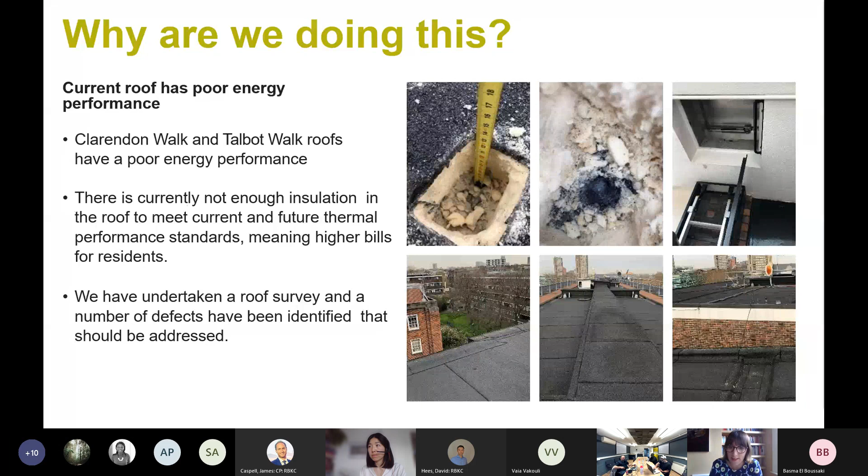Great, thank you, James. So on to the roofs in particular and why we're doing this. Clarendon and Talbot Walk currently have quite poor energy performance, and there is currently not enough insulation in the existing roofs, which means there's a lot of wasted heat and higher energy bills for residents as a result. We have undertaken a roof condition survey, and some of the images from the survey you can see on the screen here, and there have been some defects identified on the roof that need to be addressed. So what are the benefits of doing this for residents?

The first thing is really improving the thermal performance of the roof, which will help keep energy inside your home and in turn help reduce the bills. The roof improvement works are really the first step in the refurbishment of the block, and the work will contribute towards the aspiration of the estate to be net zero carbon by 2030. In summary, the benefits are lower energy bills, better thermal performance which helps keep heat inside the building, and a lower carbon footprint. It will also help us achieve a really good construction quality to deal with the defects in the existing roof.

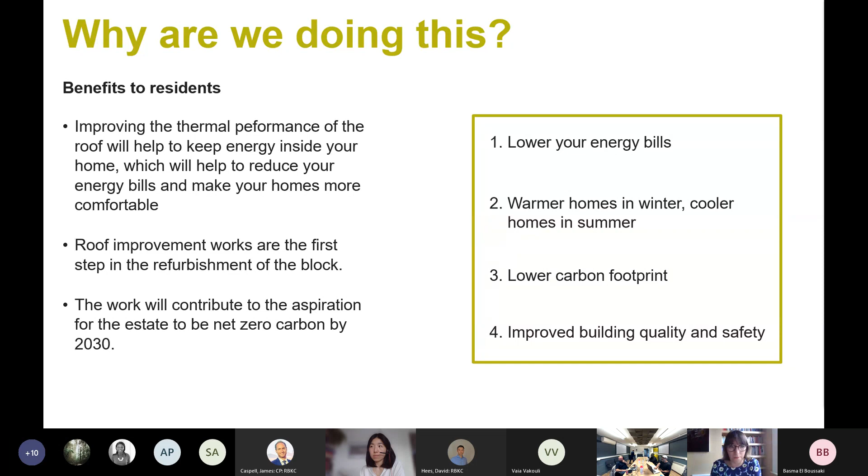This brings us to our objectives for the project. We'd like to prevent further heat loss through the roof by adding A1 non-combustible mineral wool insulation and a new waterproof roofing covering. We'd like to improve the visual appearance of the roof, both from the street and from neighbouring properties. And we would like to explore the potential to increase biodiversity and address air pollution through the works to the roof.

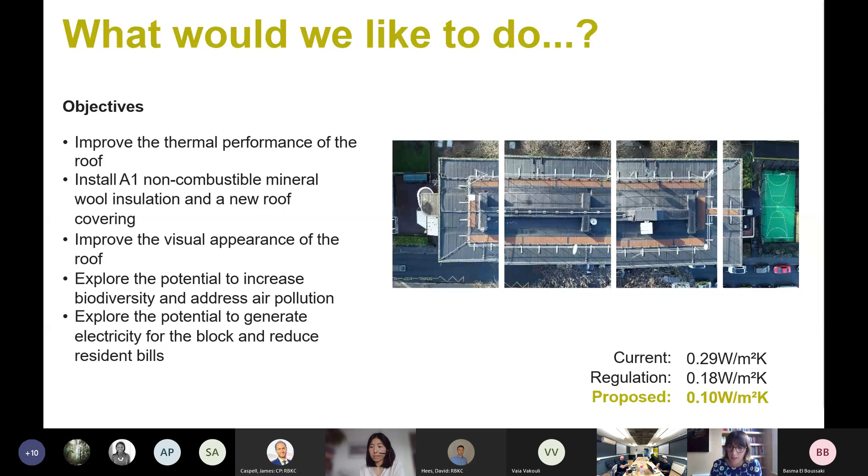We'd also like to explore the opportunity, as James mentioned, to generate electricity for the block and reduce resident bills further by looking at solar panels and how they might work for the individual blocks. There will always be some heat loss from the building, but our target for the roof is to reduce the overall heat loss down to about one third of its current heat loss.

Following the resident feedback and structural surveys, we'll then be able to move forward to complete the design development, hoping to start work on the project in autumn this year. The works will take around 4 months to complete, and our target at the moment would be to complete in spring 2022. There will be some further upgrades to the block needed as part of the estate-wide refurbishment, which will include, for example, installing new windows to the building, which would happen at a later date.

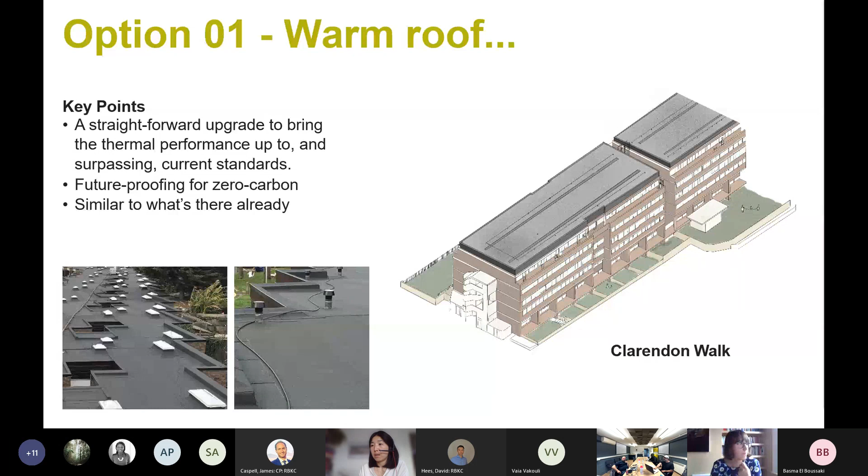This sketch shows a section of Clarendon Walk, and the next slide shows what it would look like on Talbot Walk. To give you an idea of the construction, on the left-hand side you can see the existing roof, which has roughly 10 centimeters of insulation. On the right-hand side is what we're proposing, which will have 37 centimeters of insulation and also an insulated parapet, so it's a much thicker build-up. All the proposed insulation will be A1 rated, which is non-combustible.

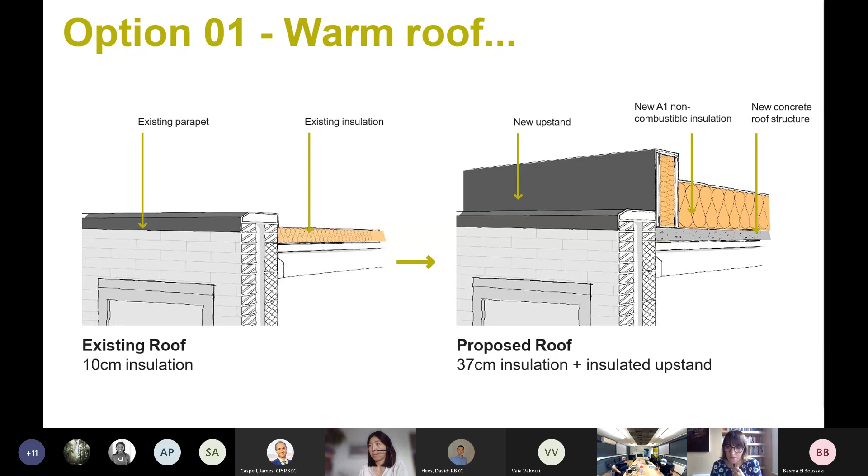So the second option we can consider is a green roof. The reasons for going green: it's visually more attractive, it can support biodiversity even if we just go for succulents such as those in the images on the screen, it can help reduce heat loss from the building as well as prevent heat gain, and it can also provide a degree of sound insulation.

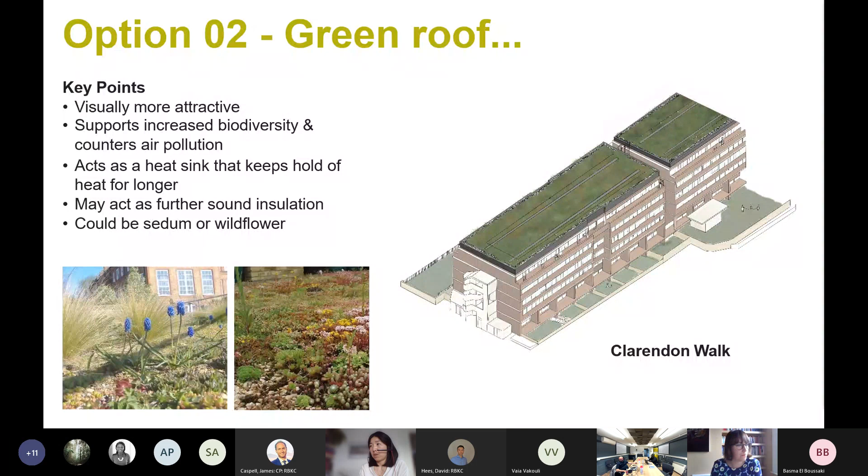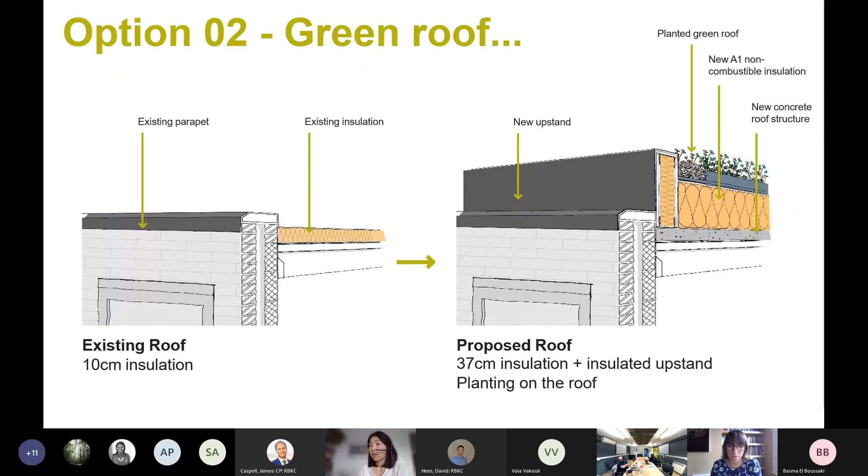So the sketch here shows how it might be applied for Clarendon Walk, and again for the next slide, Talbot Walk. Looking at the construction again, it's the same basic warm roof we showed previously with the 37 centimeters of insulation and upstand, and the green roof just sits on top of it. One point to note is that the green roof can be quite heavy, so until we complete the structural surveys just mentioned, we won't know for sure whether the existing buildings can take the extra load.

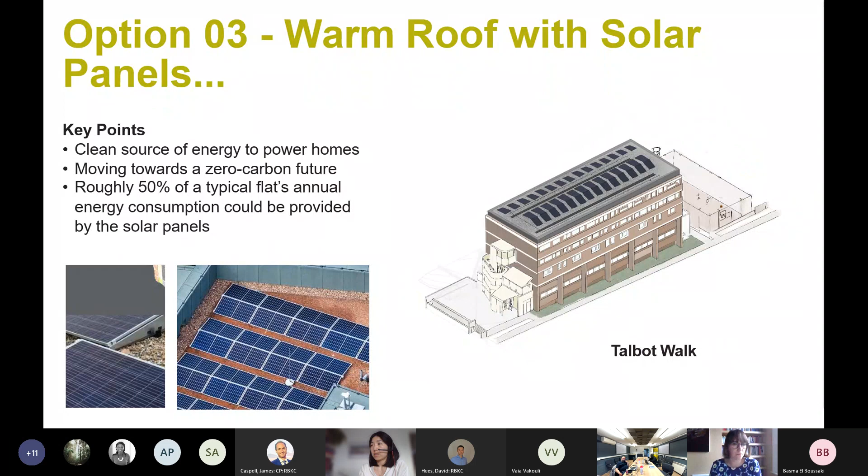So what we're showing here are the indicative layouts on Talbot Walk. Running through the construction, it's the same warm roof again, and the solar panels just sit on top.

So the final option is a hybrid solution, which puts areas of green roof next to areas of solar panels. The advantage of this option is that you can have the benefits of the solar panels to provide energy for the homes and support a reduction in energy bills, but you can also have the benefits of the green roof and help encourage biodiversity.

In this sketch we are showing the two different areas in strips, similar to the one in the photo, but you can also do different arrangements. For example, you can do half the roof or a third of the roof with either green or solar panels.

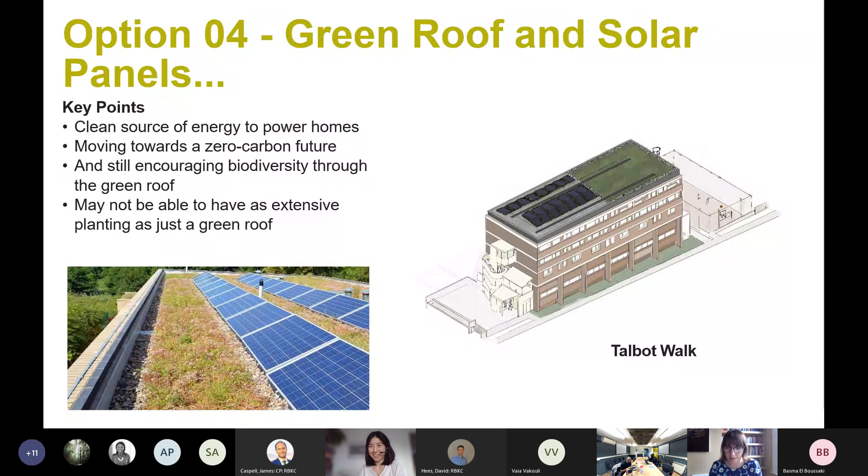Similarly, you can apply the same approach. Sorry, I froze for a second. We can move on to the construction of the build-up. You can see it's the same basic warm roof, with the PVs and the green roof sitting on top.

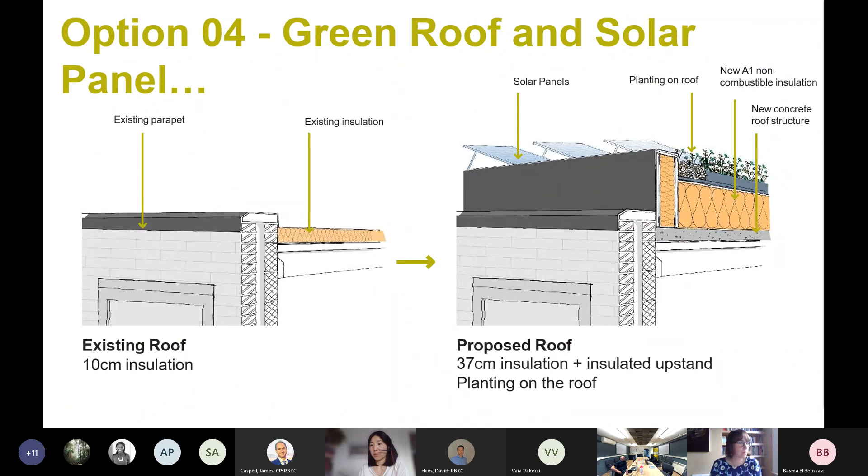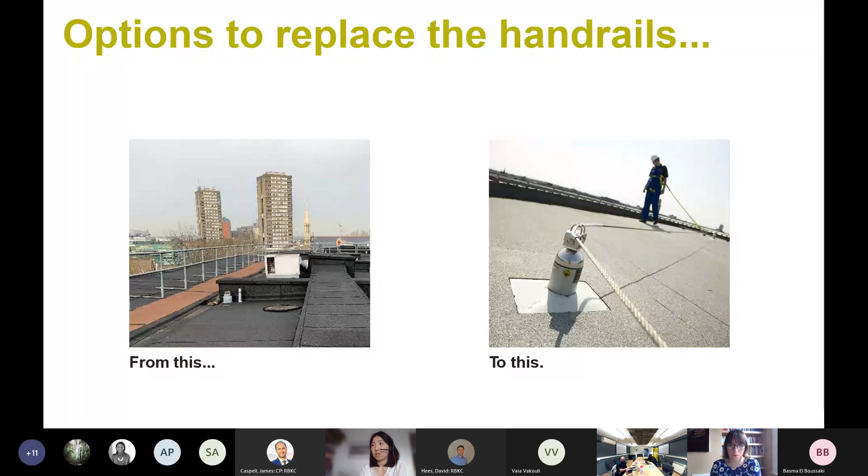To touch a little bit on fire safety, the roof proposals will be designed to meet all fire safety standards needed to satisfy safety regulations. Where possible, we're going to look to exceed these standards and use A1 and A2 rated materials as much as possible. In addition, we'll be working to the following standards, which have been recommended by a fire consultant.

This will look at strict management of the roof to ensure it's kept from drying out. We'll also make sure the growing media selected will contain at least 80% inorganic matter.

We can choose what kind of planting goes in, so it's a sedum roof made up of succulent plants. These would be more fire resistant as they tend to hold more water in the structure, and so they're less likely to dry out. We'll also be incorporating fire stops in the design of the layout, primarily around the perimeter, that stops the spread of fire.

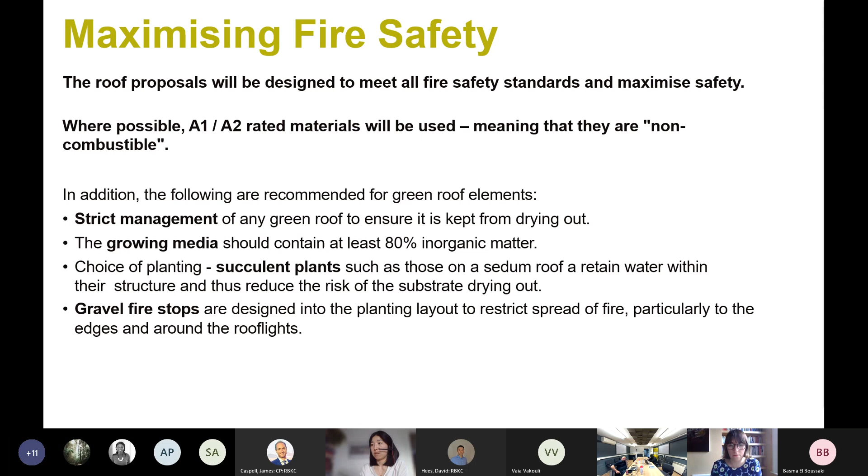Looking at maintenance of green roofs, it's recommended to be checked about 2 to 4 times a year. To maintain the warranty by the manufacturer, they require regular maintenance to be agreed through a contract. This will help ensure it performs correctly and prevent it from drying out.

For the maintenance of solar panels, it's recommended you check this once a year to maintain the warranty, and this should only be done by accredited bodies to comply. It's rare to have damage to PV systems, so most of the maintenance is really just to check that everything's working properly.

In terms of fire risk, solar panels, it's actually very low. The main risk is not with the panels themselves, but with the way the electrics have been installed. So making sure we use accredited installers will help to minimize this risk.

The other key risk area in terms of fire is the firefighting itself, and making sure the London Fire Brigade arrive with the right equipment. This is something the Lancaster West neighbourhood team are aware of, and they will work closely with the London Fire Brigade so that they're aware of what's required.

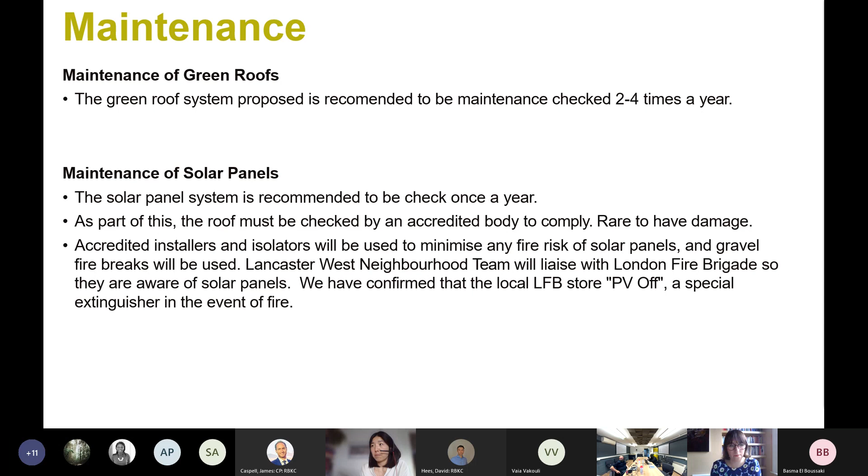Through our pop-up event we held a few weeks ago, and also the first webinar for your blocks, we received some initial feedback on the proposals for the roofs, and we've just included a section of these comments on the screen here.

To summarise, some residents we spoke to like the idea of solar panels, particularly focusing on reducing carbon emissions and protecting the environment. Some residents had concerns about allergies and pests on the green roof, and other residents were not sure if there was a benefit to green roofs if you can't see them.

Other residents were concerned about overheating in the homes, and we're very aware that there are existing problems with overheating in some of the homes in Clarendon Walk and Talbot Walk. So over the next few pages, we're going to answer some of the frequently asked questions that have come up through the engagement to date.

The first question on overheating is: will the proposals add to overheating issues residents are experiencing of their homes being too hot? We are currently undertaking an overheating risk assessment to understand the impacts of the new roof on indoor temperature, and this is happening ahead of the main refurbishment works.

We've already done the modelling actually on Camelford Court, and the results we've had is that putting on a new roof will not make any negative impact on overheating. It actually has a small benefit, but it is quite negligible. But they definitely won't make the existing situation any worse by putting on a new roof.

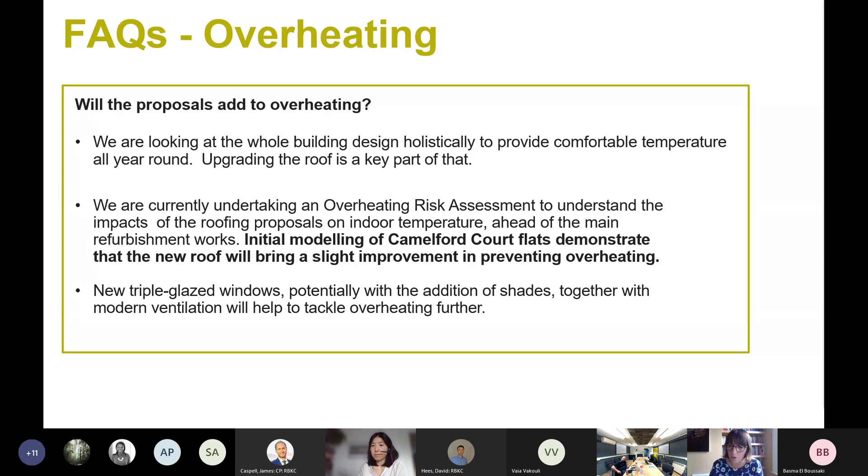When we look at the whole building refurbishment, our aim will be to provide a comfortable temperature all year round, and this can't be achieved just with the roof, but will need to be looked at through other building measures such as triple glazed windows, new ventilation system, and improving the existing district heating system. We will also look at options to introduce solar shading. So all these measures together will help to address the existing issues of overheating.

The second question is about solar panels. So the question is, in what way will I directly benefit from solar panels?

So the solar panels will generate electricity through radiation from the sun. Any electricity generated will be contributing towards the electricity needed for the homes and also for the communal areas, which means we'll need less electricity from the grid. So this should result in lower energy bills for residents.

For Camelford Court roofs, we've already done a bit of analysis on this, and we found that having 60% coverage of solar panels on the roof saved around £12,000 on the energy bills per year for the whole block. So we'd like to review this in more detail for Clarendon Walk and Talbot Walk. If residents agree, this is something to look at moving forward.

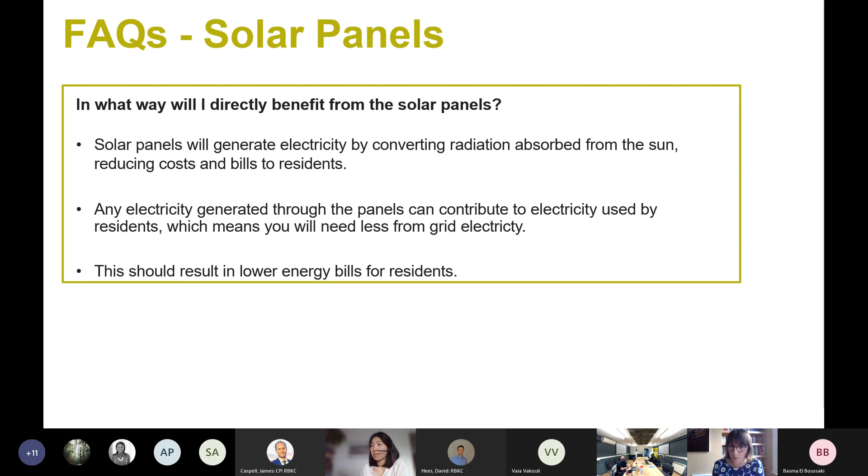So the third question is, what about the additional weight on the roof of the planting and the solar panels? Our structural engineer has been reviewing the additional loads of both the green roof and also the solar panels to make sure the existing building can take it. As mentioned, we do need to undertake structural surveys to make sure this is possible, and we will be looking for volunteers to help us as we need to access homes for these surveys.

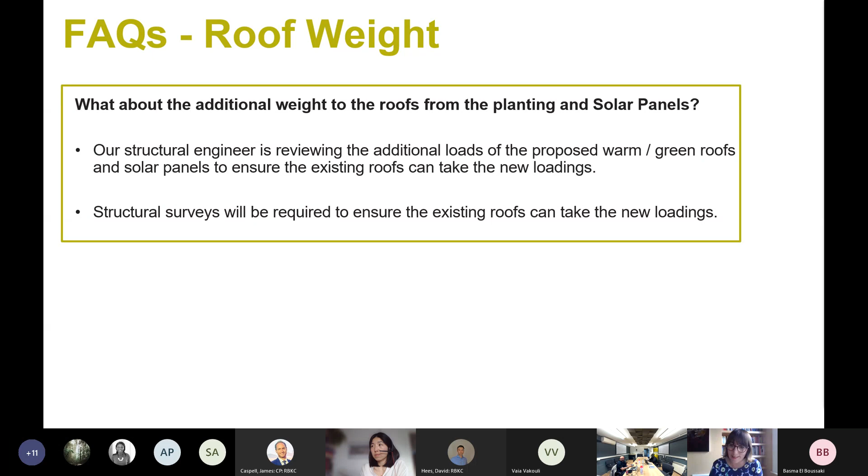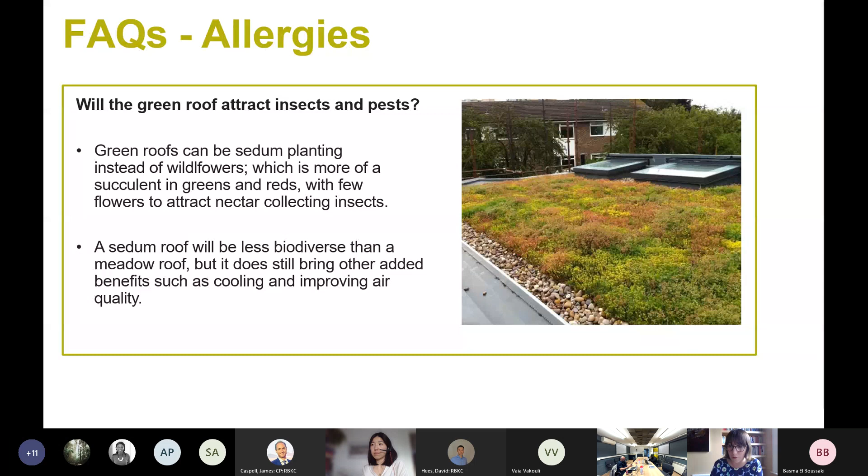So the final question that's come up a few times is regarding allergies, and will the green roof attract insects and pests? With the green roof, we can choose sedum planting instead of more wildflower or meadow planting, and this is formed of succulents. It can come in different colours - green, reds and yellows - and these have very few flowers, so they don't attract nectar collecting insects. Although a sedum roof is a bit less biodiverse than a meadow roof, it does still bring benefits of cooling the block and improving the air quality around it.

So just to quickly touch on the work we've been doing on Camelford Court roofs in co-design with the residents there, as it's quite relevant to your blocks as well. We've been looking at different options for green roofs and solar panels on those blocks, and looking at a combination of the two. We've also been looking at potentially having a gravel motif on one of the roofs of the blocks, also co-designed with residents. These roofs are overlooked by Camelford Walk.

So we would encourage residents of Camelford Walk to also be involved in this process. We'll be recording a webinar to update residents on the design specifically for Camelford Court on Tuesday, which will be uploaded to the W11 website. So everyone please look out for that one.

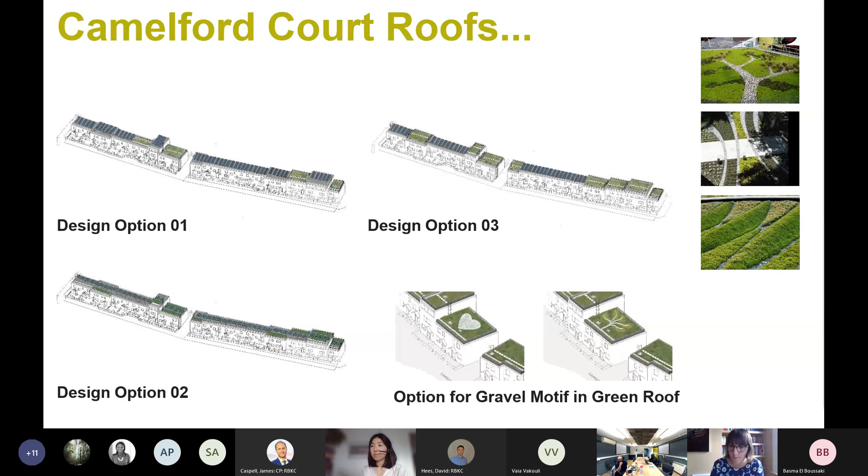So just in terms of safety, during the works, it is a top priority to ensure that all construction work is done safely and with minimal impact to residents.

Lancaster West Neighbourhood team have appointed Derisk as their principal designer, and their work is to plan, monitor and manage the health and safety of the construction works.

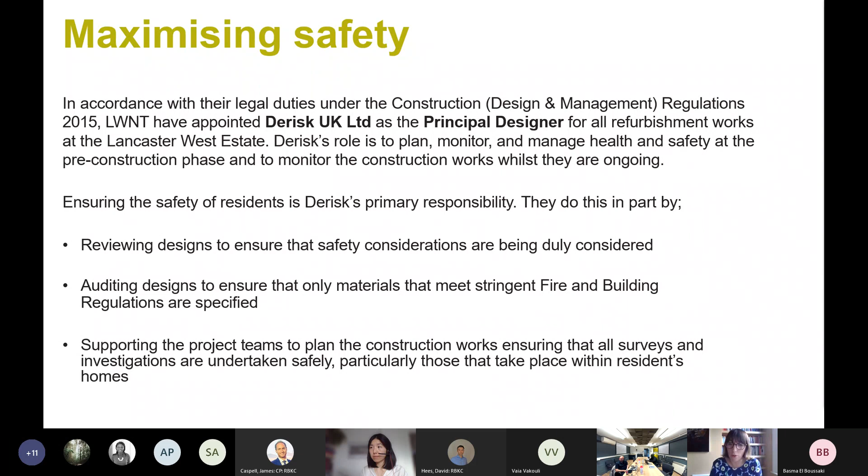There are a number of measures that they put in place to do this, which include reviewing any design proposals, making sure that all safety considerations are being considered. They will audit any designs as well, to make sure that only materials that meet stringent fire and building regulations are specified. They will support project teams to ensure that all work is undertaken safely, particularly those that impact residents' homes. They will also review the contractors' health and safety competencies, making sure that only contractors with strong safety performance are selected to work on the estate.

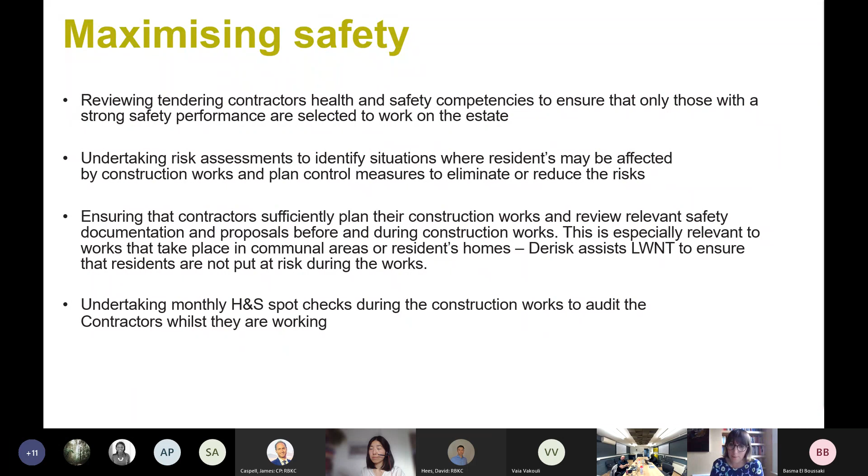They undertake risk assessments to identify any situations where residents might be affected by construction work and plan control measures to make sure that any risks are eliminated. They will also work with contractors to make sure construction work is sufficiently planned, that safety documentation and proposals are in place before and during the construction work, and undertake monthly health and safety spot checks during construction work to audit the contractors while working.

So just to move on to respites, James, did you want to speak to this slide? Sure, thanks Annalisa. So one of the things that we've learned from the internal refurbishment programme, and more recently communal works we've done in a number of blocks, and also the installation of fibre optic broadband, is the need for us to do more with regards to providing respite opportunities. That could be to rest, to socialise, to work, to study, and in some cases to sleep if, for example, you're a night shift worker.

We've recently launched our new respite booklet, which details our current offer, which, given the coronavirus restrictions that are still in place, is far more limited than we would like it to be.

Just to outline what that looks like, people can come and work at Baseline Studios, either in a shared working space or privately in an office if they need to, with free superfast Wi-Fi as of last week, and free refreshments like tea, coffee and soft drinks, available for people who want to work or study. We've had a few people now take advantage of that offer.

In terms of roof works, particularly for those of you on the top floor, we're able to offer temporary respite, which might mean temporarily staying in other properties in other blocks. We also have our refurbishment decant scheme, which allows people who haven't yet had an internal refurbishment to move permanently to a fully refurbished home, minimising the disturbance they'll need to go through. So we've got a range of measures at the moment.

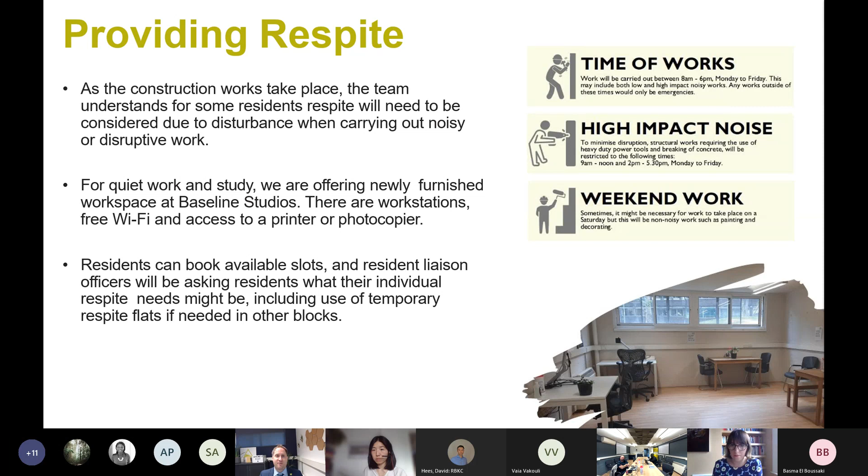We recognise, especially in this estate, the level of distress that can be caused by noisy works. There's a history in the area of lots of work going on, and I just want to reassure you all that we absolutely recognise this is going to be really important and a concern to residents. You'll hear more from us on that well before we start any of the works. Thank you.

As we mentioned a bit earlier, we're not able to move forward with any of the options until we understand the existing structure better. We've got some ideas of what we can do to fix different scenarios, but we just need to know what that scenario is first. So to do that, we need to survey the roof slab, which unfortunately means we need to get access to your homes.

We need 2 properties from Upper Talbot Walk, just the ones with the top floor level, which I think are numbers 1, 3, 5, 7, 9, and 11. And then on Upper Clarendon Walk, we'll need 3 properties, one from each section of the block.

The survey will involve removing a section of the ceiling, about 2 by 2 metres wide, on the upper floor next to the window. Once that's removed, we'll scan the slab to understand the depth and structure inside it. This shouldn't take too long, not more than an hour or so. Once that's done, the Lancaster West team will replace the ceiling and redecorate it for you. Just to note, on Clarendon Walk we'll need to do the survey on the lower level as well, because there's a terrace roof slab in there.

So I know the Lancaster West team are currently looking for volunteers from these properties. So if you are able to help, it'd be really appreciated.

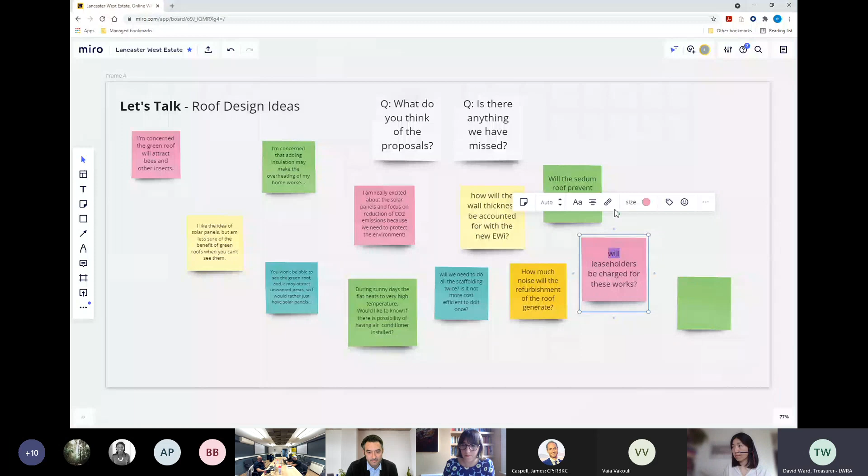Oh, hi, thank you. I've actually got 3 questions. First question, how have the works been costed and how much of the grant covers those costs?

Do you want one by one or all in one go?

Go ahead with all your questions and we'll answer them together. If the structural survey comes back and says the options are limited, will you do strengthening works? Is that what you're talking about, the concrete to strengthen the roof so you could enable other options? And lastly, if there's PV on the roof, how will you distribute that between residents equally and fairly? Or would it be better used for the proposed heat network?

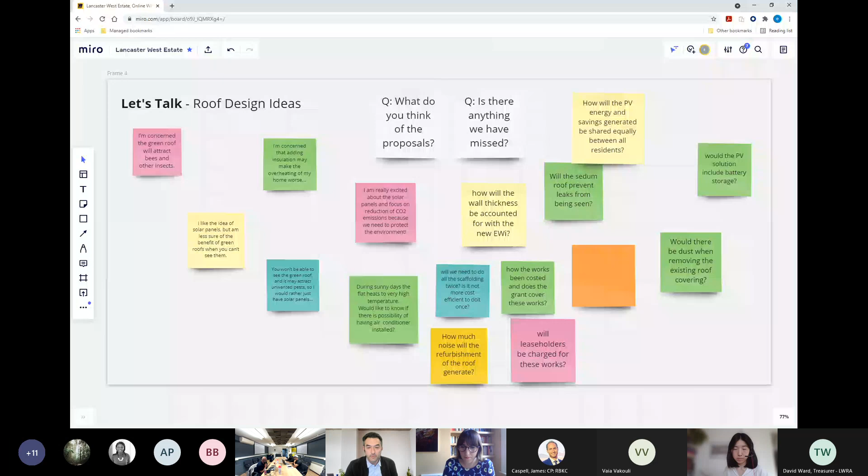We can carry on. I'd like to thank everyone tonight for their contribution, especially the architects. It was really useful and interesting just to understand the different options and design elements that we're proposing, and also really useful just to hear the feedback from residents. So thank you very much for that.

Annalisa, if we could just have that next step slides. Great stuff. Right, so furthering from what we've heard tonight, we would love to hear your views on the options that we've spoken about this evening. A copy of this presentation will be available for all the residents, and a recording will be available on the W11 website and the app, and it will be uploaded to YouTube. You can also use an online survey to send us your preferences based on the different roof elements we've chatted about. There'll also be a paper survey sent through the post to all residents, and we'll also be undertaking some phone engagement and door knocking to gather your views.

Regarding the online survey, I believe there will be a link posted in the chat, but that will also be put on our relevant communication channels. It'll be on the app as well for everyone to give their specific feedback. So once we receive that feedback, and obviously complete these very important structural surveys to the roof, we will then present a final detailed design with options for residents to agree on. So any comments or thoughts are very welcome. Please do use all the channels below. You can also see some contact details, the Lancaster West office email, and the website, and we also have the app which you can download from the App Store.